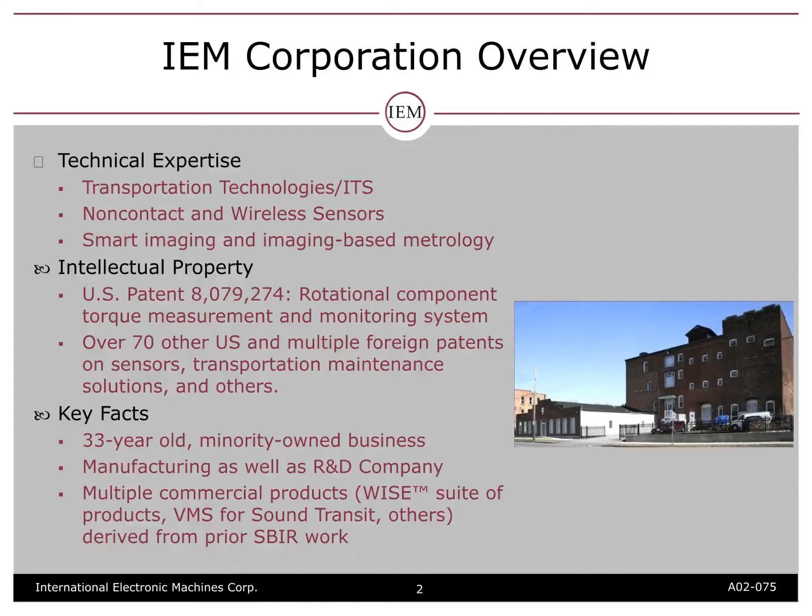We hold over 70 U.S. patents, including some directly relevant to the non-contact torque measurement system. Though this project is for the Navy, it actually goes back all the way to 2002 and an Army project which had the same interest in a non-contact, high-speed, and high-accuracy measurement system that could be used on existing and future rotorcraft. Currently, the transition target is the CH-53K.

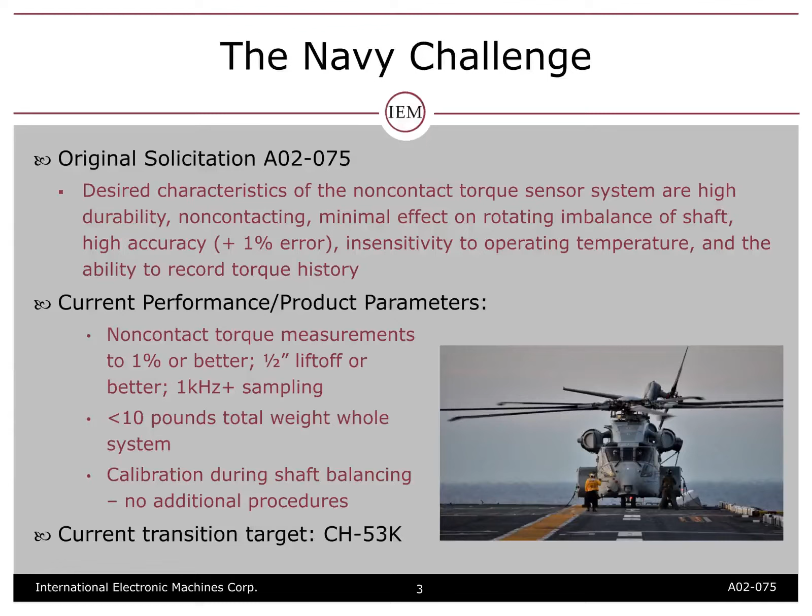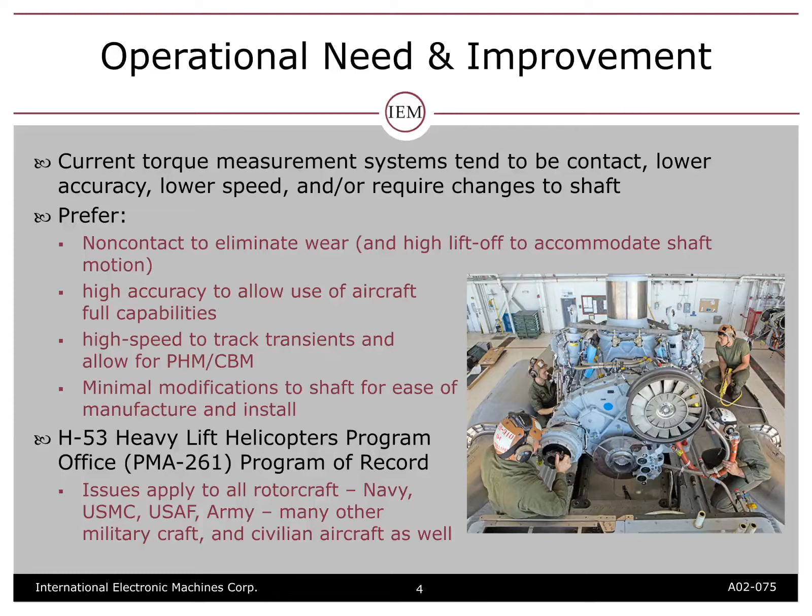All current torque measurement systems have one or more shortcomings which make them less than ideal for the application. These may be that they are contact systems, have low liftoff, low accuracy, low speed, or they may require actual changes to the shaft design or manufacture. It is obviously preferable to not have any of these shortcomings, have a non-contact, high accuracy, high speed, and zero modification system with high liftoff. While PMA 261, heavy lift helicopters, is the program of record, this technology can apply to military and civilian helicopters and other forms of transportation as well.

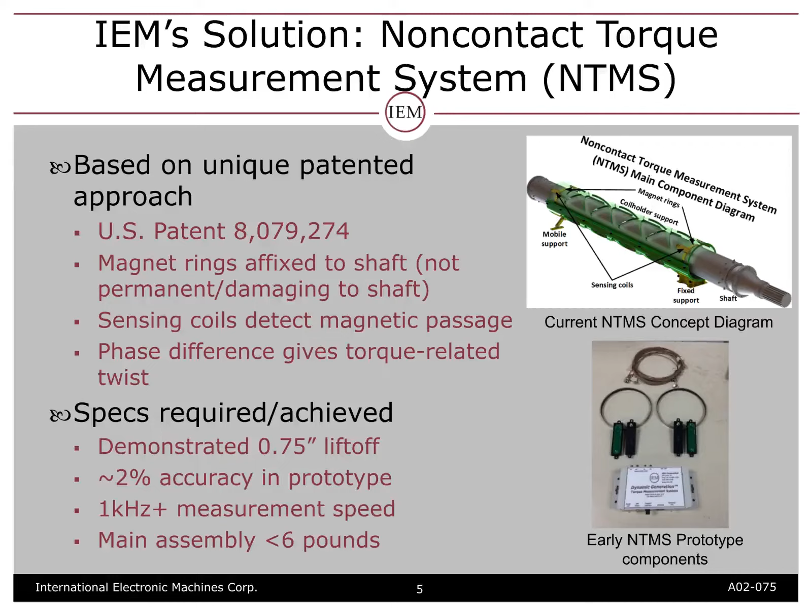IEM's non-contact torque measurement system, the NTMS, addresses all of these shortcomings. Based on a patented electromagnetic sensing method, the NTMS is not only usable for new aircraft, but is retrofittable as it requires no actual modifications to the shaft. We have demonstrated a 3/4 inch liftoff from the shaft, a better than 2% accuracy overall in prototype, and can sample at over 1 kilohertz speeds in order to detect transient as well as steady state torque.

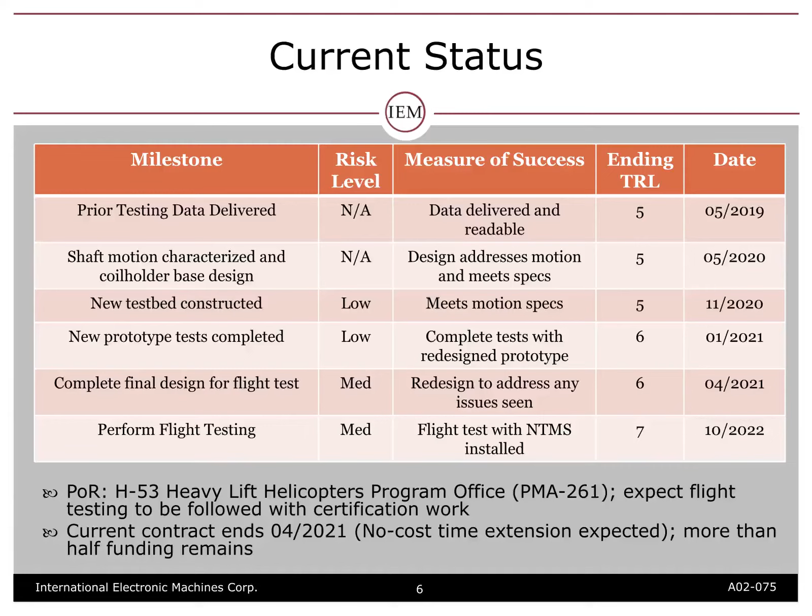COVID caused some significant delays in development over the past year or so, but following the overall success of the alpha prototype, the upgraded beta prototype is now being manufactured. The testbed modifications are complete, and we expect to complete risk reduction testing shortly, which will open the door to off-site and flight testing in 2022. More than sufficient funding remains to complete all tasks of the project.

So, what's so cool about the NTMS? Well, first of all, it's a completely non-contact system. That means that during operation, it does not wear, thereby reducing or eliminating the need for maintenance once the system has been installed. Installation itself is simple and requires no modifications to any other component of the aircraft, as the only required components are a set of rings that are applied non-permanently to the shaft and sensor coils that are installed at considerable liftoff, up to 0.75 inches from the shaft.

The system in its final form will be better than 1% accurate, allowing, along with the high-speed sampling rates, the ability to perform full predictive health maintenance on the system, which is a considerable cost savings compared to standard scheduled maintenance. The better than 1% accuracy also means a far more efficient use of the aircraft's power plant. And this means that you will have an effective increased maneuverability and or cargo carrying capacity.

It has the high-speed data collection, which is necessary for PHM and CBM, so that you do not miss transients, and does all of this with very low power operation in a situation which would even potentially allow for generating its own power and thereby requiring no wires at all for installation and use.

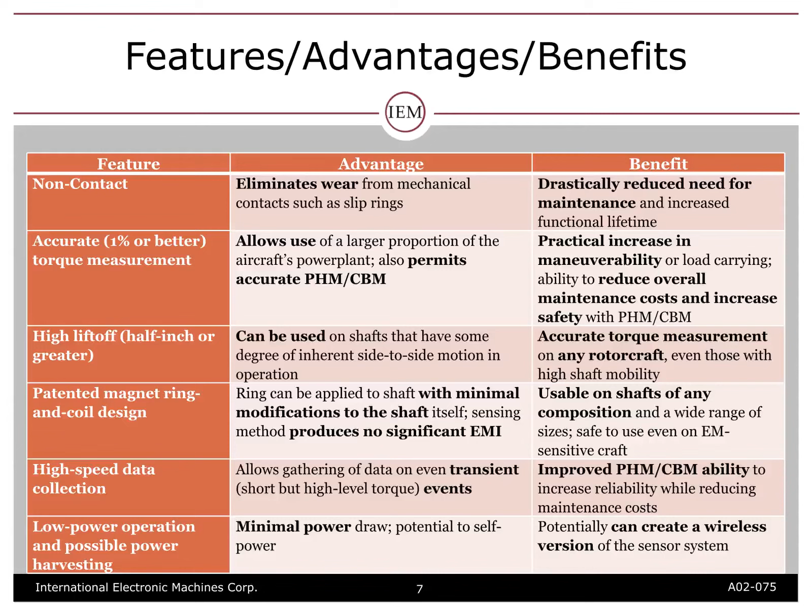Flight testing is already planned for the NTMS, and following that, IEM will proceed to certification of the system so that it may be used on board actual operating aircraft. The overall cost total for this work is around $3 to $4 million. We expect, of course, to transition to the CH-53K, but IEM is keenly interested in transitioning to any other aircraft that may have similar torque monitoring requirements. The rough timeline shown is roughly correct, possibly a little delayed due to the COVID delays, but we hope to be able to catch up given the amount of time until final transition.

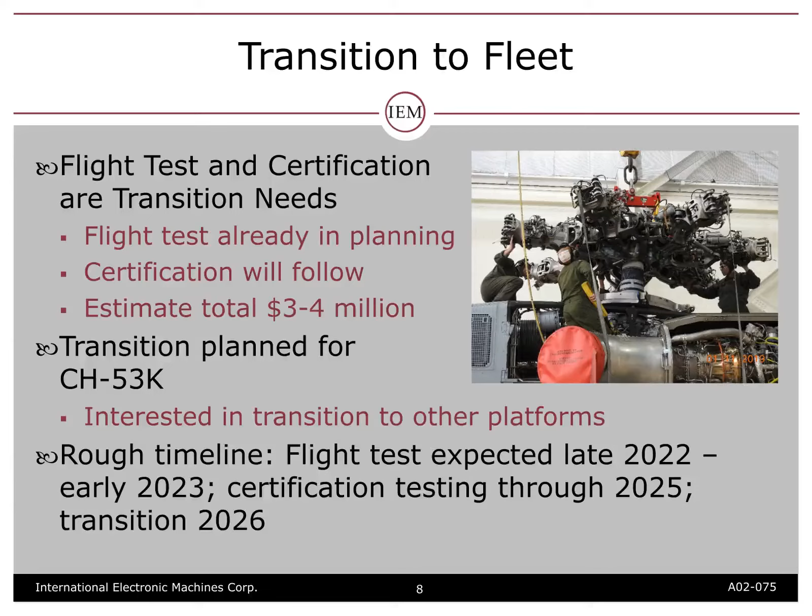While the NTMS is targeted initially for the CH-53K, the technology itself has a very wide potential market. Not only could it be applied to any rotorcraft, but to any system that has a drive shaft that needs to be monitored for torque. This could be a fixed point generator, another aircraft, even a naval vessel. And this could apply to applications in both military and civilian areas.

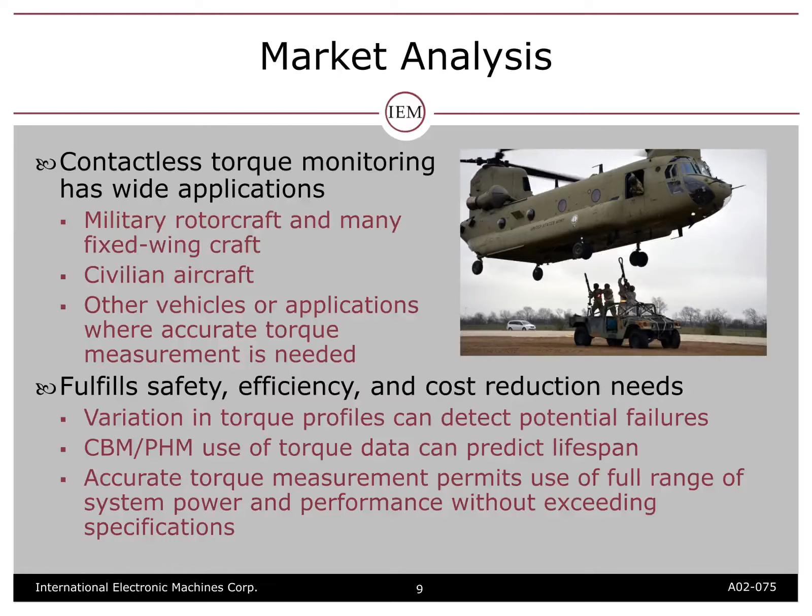For military purposes, it fulfills safety, efficiency, and cost reduction needs. This allows it to help in the detection of potential failures, predict the lifespan of the components connected to the drive shaft, as well as the shaft itself. And accurate torque measurement permits the full use of the power plant itself, rather than having to reduce power because you are uncertain as to whether or not you are actually reaching the limits of the aircraft.

IEM is very enthusiastic about the potential for the NTMS technology, as it represents a relatively low cost and very high return approach to torque measurement. For our current program of record, which is PMA 261, we still need continuing support for the flight testing, certification, and especially limited deployment demonstrations, which will assist us in moving to full transition.

IEM is, of course, very interested in expanding these contacts to other rotorcraft primes to allow us to transition to the other rotorcraft platforms, both in the Navy and the other services. Such prime support would also allow us to eventually transition to civilian rotorcraft, aircraft, and maybe even other applications.